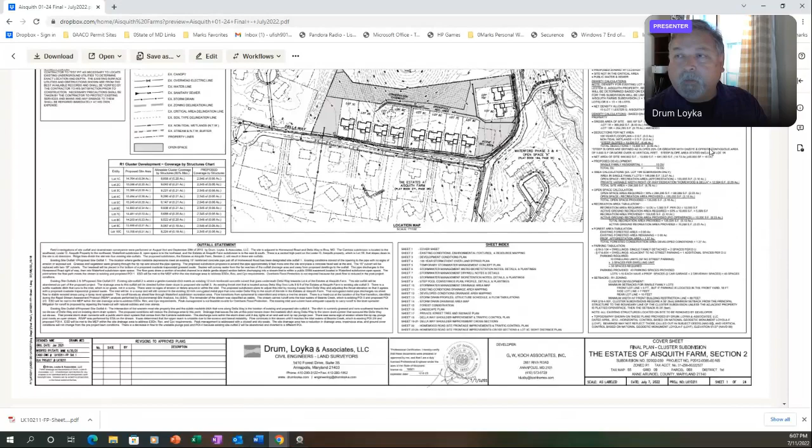So I'm going to slide back down to the step pool plan. First, in the existing condition, there's an existing squashed 15-inch pipe, looking at my north arrow, to the east of the big mansion house that's at the top of the hill, which is Lot 1R of the Estates of Aisquith Farm.

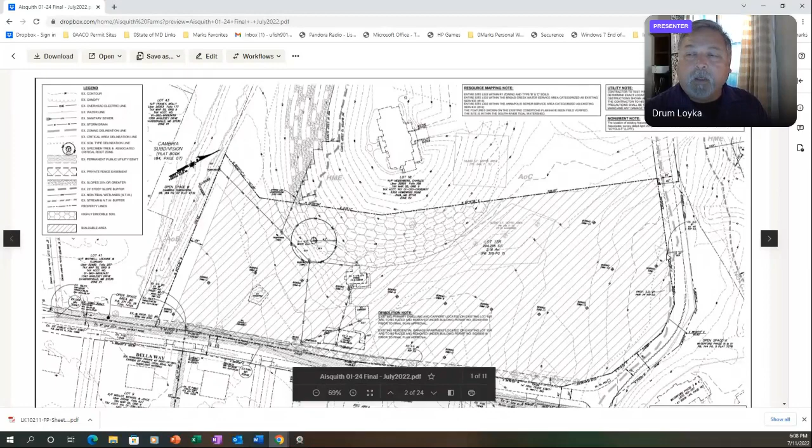And there's a sump area on the south side of Homewood Road that currently drains drainage area, but a majority of the water comes straight out to Homewood Road and runs along that north side and then enters the woods here. And you can see these curved contours is where that head cut has begun to form in the existing conditions.

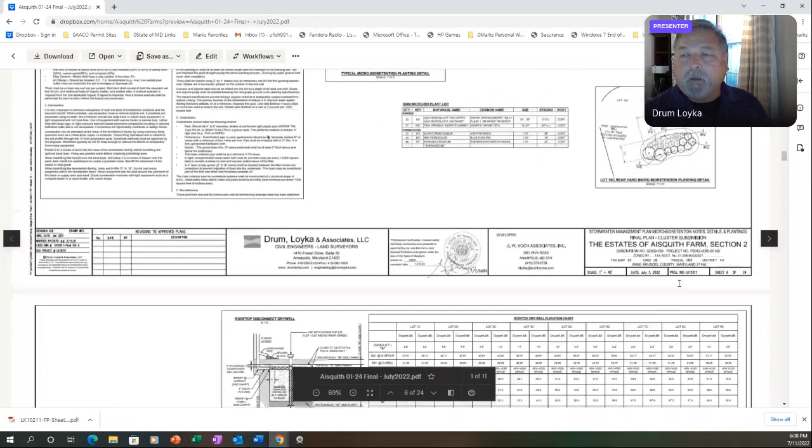And so I'm going to scroll back down to our plan, just so this is a zoom in of that area where the eroded swale comes through this site and where we've designed our system. Specifically, this meeting has discussed that existing head cut issue and the proposed developments of offsite improvements in conjunction with the subdivision of Lot 15R Estates of Aisquith Farm.

So the tax accounts involved are 102-6900-7457, 102-6900-74-965, and 125-690-222-527.

It's Tax District 1, Council District 7, the Honorable Jessica Haire, County Council person for that district, tax map 55, Grid 10, Parcel 323. The zoning in this area is R1 residential with 1 dwelling unit per 1 acre area. So the site itself where the subdivision is going is not in the critical area, but the step pool conveyance system is within the critical area.

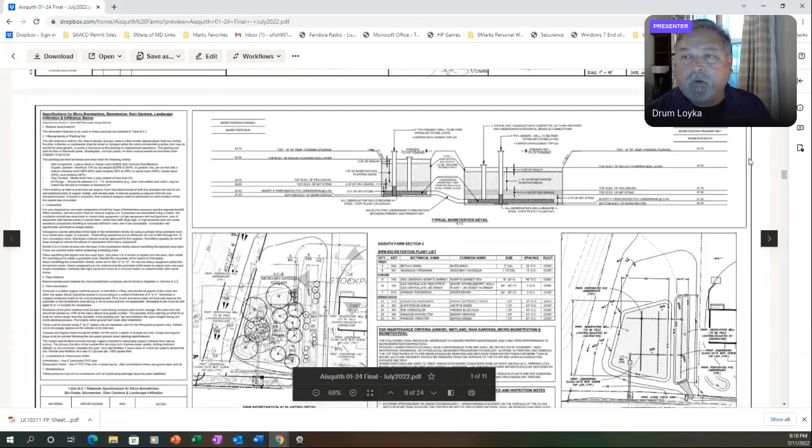So I'm going to slide up here just to show everyone that as I'm talking. The critical area line, here's our subdivision. This thin line here, it says RCA, critical area, is about midway through the open space of Waterford open space C, where the critical area line forms.

So the upper part of our step pool conveyance system is not in the critical area, but as you get closer to the stream and 100 feet of the stream, as we're trying to take this eroded water, stabilize it, and take it to the stream itself in a more stabilized fashion, we do enter the RCA critical area and the 100-foot buffer to the existing stream up from Beards Creek.

So the site is currently served by public water and sewer. We're extending public water and sewer where it ends right now at Delaware and Homewood, up Homewood Road to the end of our property to serve our 2 lots there and for potential future service of the lots, the big mansion house above us.

The schools in this area are Davidsonville Elementary, which is currently closed, Central Middle open, South River High open. The school impact project was on a 6-year waiting list, probably about 8 years ago now, and came off that waiting list, which allowed us to move forward. We're in the final plan phase of the project status.

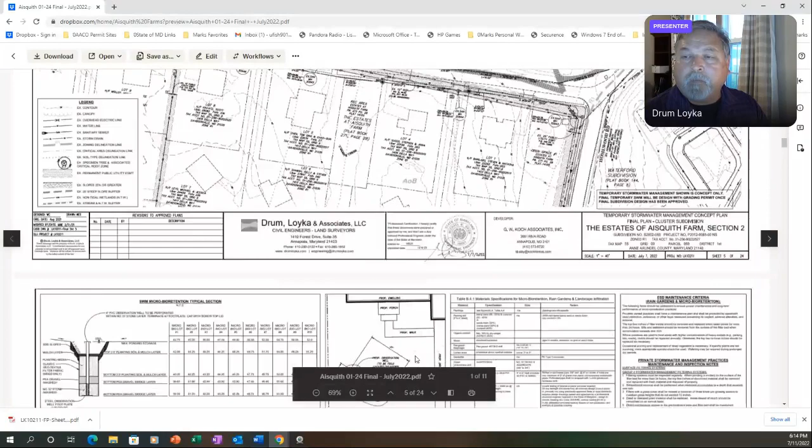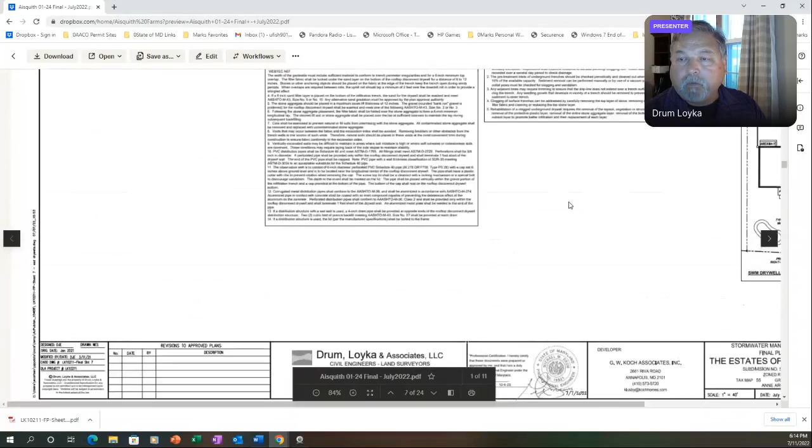So we have submitted an exhibit to the county as part of his evaluation, and I'm going to go back to that bigger plan page just to show you that exhibit. So I'm going to zoom in here. So the step pool conveyance system is a series of bays that hold water in a waterfall-like effect that collect the water from the head wall, settling it, taking the energy out of it, and working its way down in a cascade-like fashion till you get to the actual stream embankment.

The areas of the pocket wetlands: the stream is here, this double line here depicts the stream. One group of pocket wetlands was here to the south or southeast of the stream itself in this area here, and you see the 25-foot buffer in the dash line there. And then another pocket was found on the north side or northwest side, and the 25-foot buffer to that pocket was depicted on the plan.

Our LOD and our easements through the property are all between those two pocket wetlands in the area where the actual head cut is and the erosion is. So we are not disturbing non-tidal wetlands as part of our development. We are, however, disturbing the 100-foot stream buffer, which is this thick dash line here that runs from the stream up into the woods.

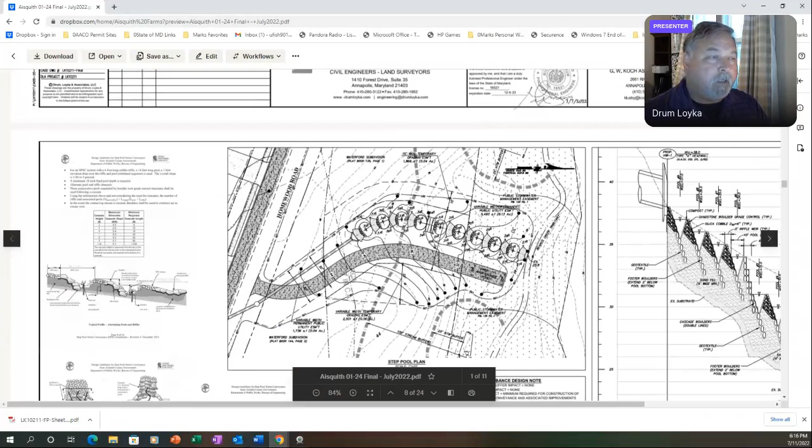This is the area of woods, and I don't know if those who are present know, but several years ago a tornado came down within that open space valley and knocked over a bunch of existing large trees in that area. If you were to look at this site 5 years ago, it looked all wooded. Now, on the aerial photo, you can see all the laydowns from those trees that were basically ripped open and knocked down as part of that tornado.

So in the existing condition, in the vicinity of the tributary stream of Beards Creek, which has that 100-foot buffer, there is disturbance within the stream buffer to construct this conveyance system that we worked with the Department of Public Works and Inspection and Permits to design to handle that existing head cut.

And I'm just gonna see if I can share some photos of that area with you while I'm talking, to help you get a feel for what that looks like. Oh, it's not going to let me do that, is it? I may share photos a little bit later. Right now, I don't want to. If I get out of this thing, I think I'm gonna lose my connection with you all.

But basically, the head cut starts about 30 or 40 feet in from the edge of Homewood Road, and then just gets deeper and deeper. It's like a foot deep up here near the top. And then by the time you get to the bend here where the stream erosion bends around, it's 3, 4, 5 feet deep that cuts through here, it is just eroded through this area.

So the step pool design, and I'm going to show you a profile of that, allows us to pick up that head cut and create energy dissipating pools that'll help slow the water down and dissipate it and slowly cascade down till we get to the flatter area at the bottom where the stream is. There's a large flat area to the south of the stream, and then about 50 or 60 feet in, it starts the steeper area of slopes, and that's where you see that eroded area.

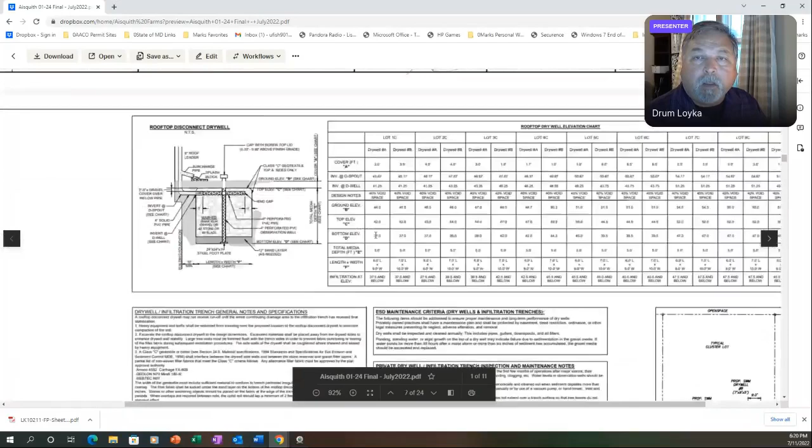Let's go back up to the top here for a second. This entire area to the north of our site is a big empty meadow with a single 42-inch hardwood specimen tree in the middle of that field. We are reforesting or afforestation all in this upper area here between us and the mansion house above us. So this whole area will be replanted. And then in addition to that, as part of the step pool conveyance system, there's a lot of planting that will go on along the edge of the pools themselves on both the east and west sides.

And then the county has asked us as part of this design to have a mulch access path so they'll be able to get down and maintain this pool as part of its overall development over the years. So we have this mulch access path, not asphalt, not concrete. It's a mulch access path, and there'll be more planting in the area where we're disturbing to grade out the path and the step pools to help stabilize this area.

The wetlands delineation and its buffers and the proposed limit of disturbance have all been adjusted to make sure we stay out. As our wetland consultant asked us to try and stay out of the stream itself, we pulled things back here to do just that, but we still have to outfall to the stream to convey the water. If we stop 30 feet short, it's just going to erode out down to the stream the rest of the way. So we're taking our conveyance to the top of the embankment of the stream.

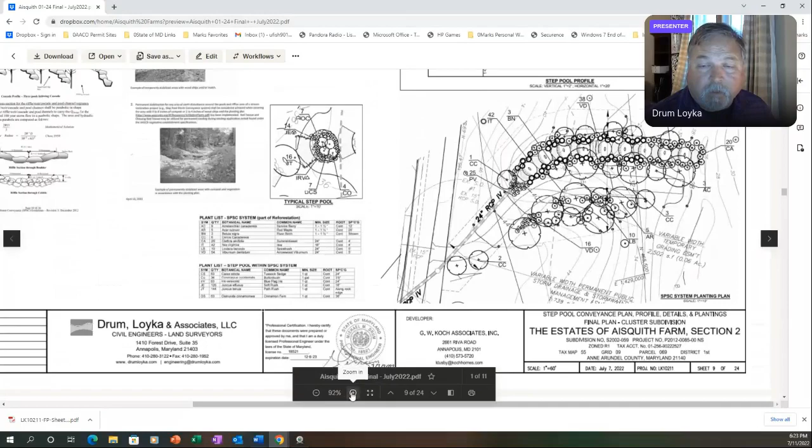So in this area, I'm going to see if I can zoom in here. If you're with DPW, hopefully you've gotten a copy of this. This planting hasn't changed since our last submittal, but as I zoom in, it seems to be getting a little blurrier. I apologize for that, but I believe Deb knows her native versus non-native species well. Lisette, if I stop sharing, would it be easier for you to try and share, if you think you can zoom in on that list better? Right now, I'm using a PDF. Go ahead. I think my wife has a hard copy of this that she got in the mail.

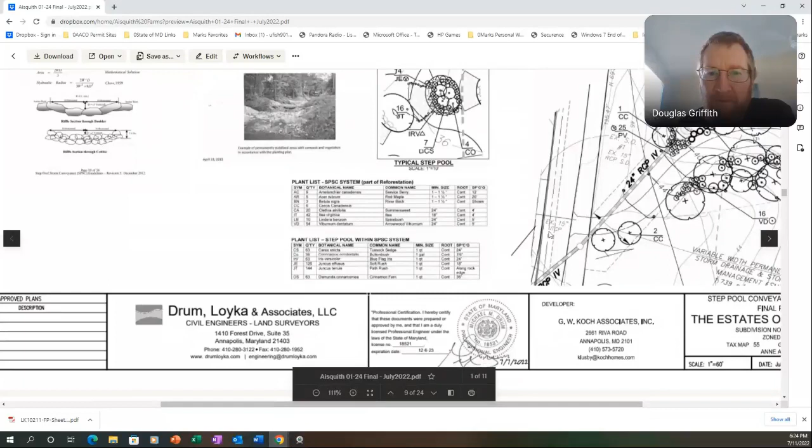So maybe I'll look at that, and if I have any questions. Yeah, and worst case scenario, that's one of the reasons we get the email addresses of everyone. We mail out meeting minutes and address questions, but we can also email PDFs of the plans to anyone, Doug and Linda, Cynthia, or any of them.

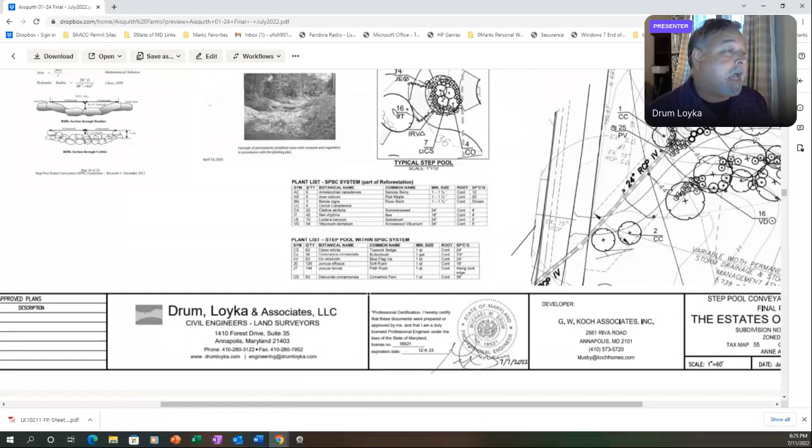I will warn you that one specific sheet is not a bad email as far as size. If I try and email you all 24 sheets, it's like a 150 meg drawing. We can try and zip it down, but I can specifically send sheets pretty easily. They're much smaller. It's just the conglomerate of 24 sheets that makes that email slightly bigger.

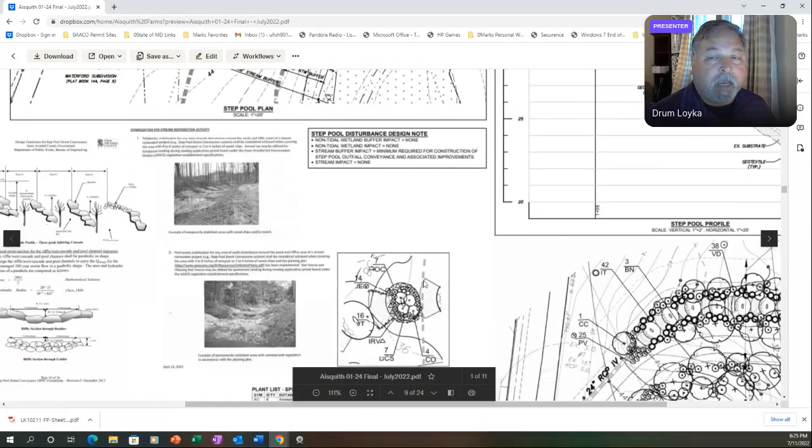But we can do an 8.5 by 11 zoom in of the species list to make it easier to read. I can see it, but as I zoom in, at least for me, I'm assuming it's the same on your screen. Yeah, it's pretty small. Yeah, tough to see. I'm sorry, Doug and Linda, did you guys have a question?

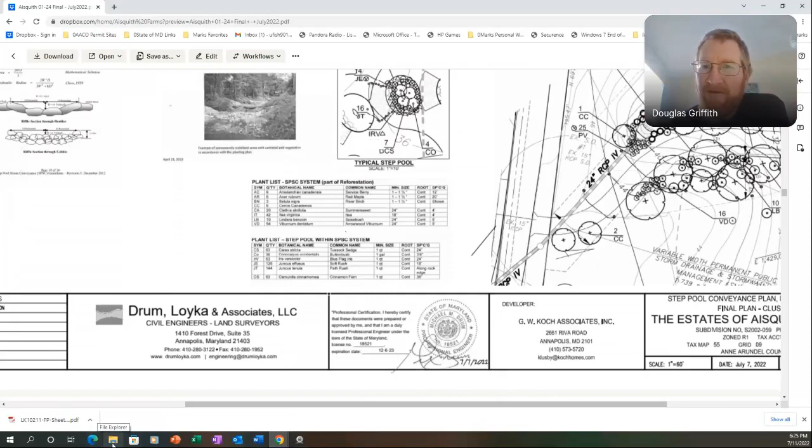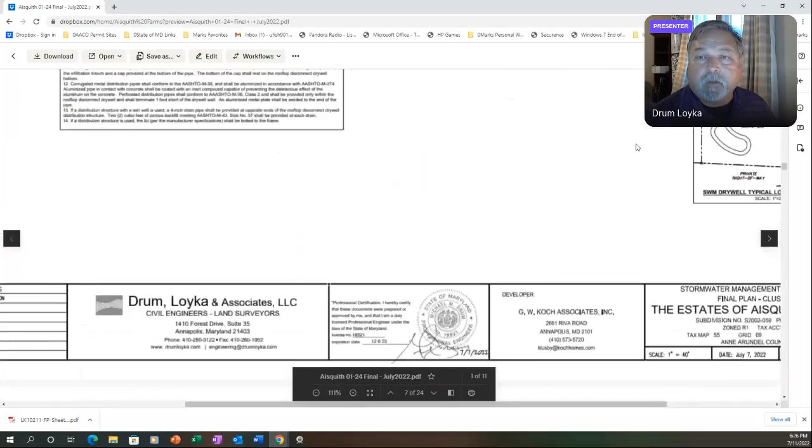I do have a question. It talks about the step pool having frontage on both Della and Homewood. I'm sorry if that's poorly worded. It only has frontage on Homewood. So where the step pools are being created only has frontage on Homewood. I'm gonna go up to the very cover sheet, which has the design. So the intersection of Della and Homewood is down here. Right. The step pools are up around the bend.

If you know the area, the existing bituminous curb ends about here, and then it's just open section road as you head up Homewood towards the driveway that gets you access to the lot 1R mansion house. Correct. So the old 15-inch pipe is right here. Okay. And the erosion is, if you go in through the woods, there's a little opening there from time to time, when the brush hasn't grown up.

Exactly. If you go in there and walk into the woods about 30 feet, it's flat up here at the top, but as you work your way northwest, all of a sudden you'll see that head cut. And I have pictures when it was pouring down raining, and you can see the path of the water coming through the woods. But I fear that if I try and bring them up right now, it's gonna log me out. But I can also include them.

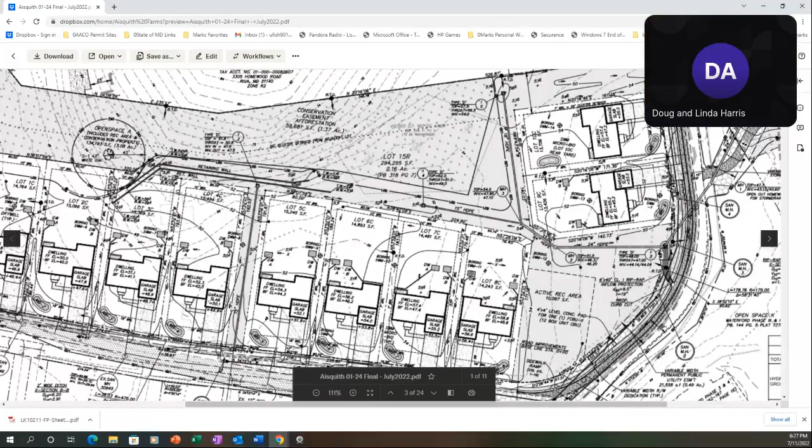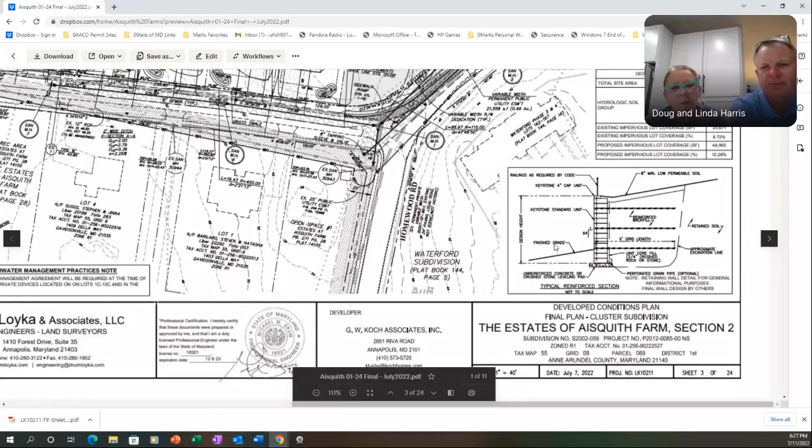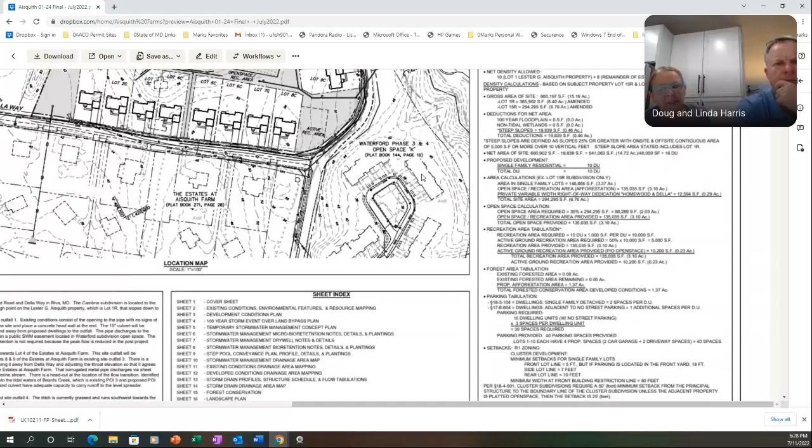Yeah. So right now, we already get a ton of water coming down our hill. So we're wondering, is this going to help us as well, or is this going to make it worse? To answer that question, I believe absolutely, because right now water comes off this whole upper hill here and drains down Della out of this driveway. This little 15-inch pipe that's currently there now is squashed. If you've ever walked up along this road, it's hard to even find it because the grass is so high.

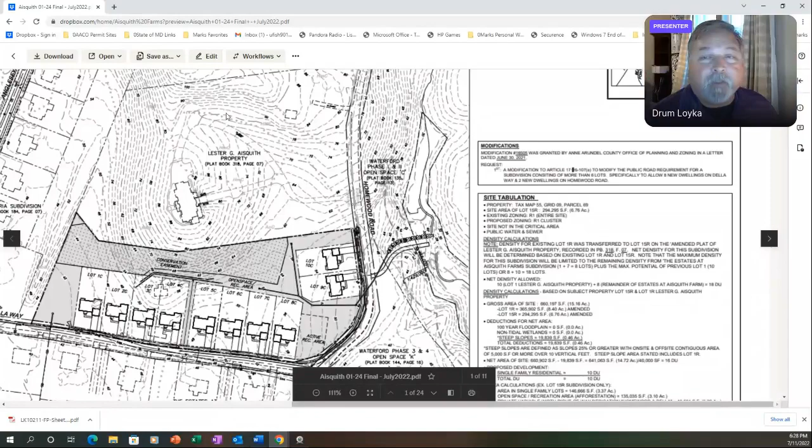Yeah, I know what you're talking about. It's our observation when we were out there doing our topo and location that very little water actually gets into this little 15-inch pipe. Yeah, we'll attest to that. Everything comes down from this mansion house. Let's see, I think I have a pretty decent drainage area map here.

Go up to the top and actually read my own legend. I can probably find this a little faster. It's a little tough to see, right? Yeah, it's a little tough to see. I was trying to find my overall drainage area map. Sheet 10. Okay.

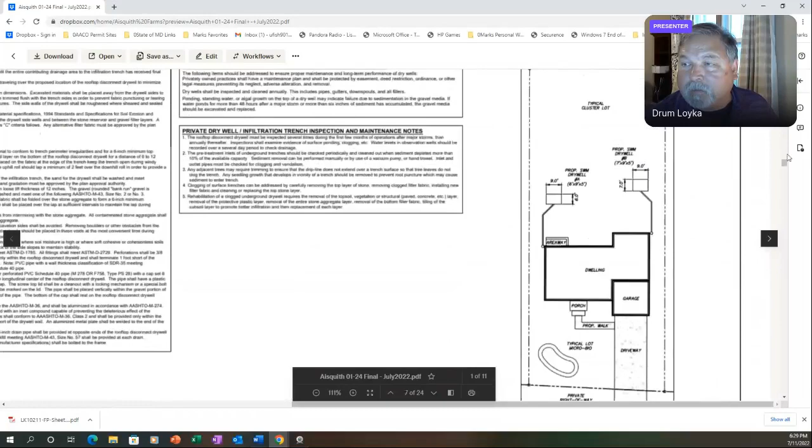So that's sheet 6. I'm going to slide down here a little faster. There we go. Aha, that's better there. That's sheet 11, sheet 12, 10. There you go. So right now, all this water comes way up from the top, even beyond the mansion house and to lots above it, and drains down Homewood Road here.

And then this area here, in theory, was going to that 15-inch. A lot of this was going to that 15-inch culvert. It couldn't handle it, so it was topping over the road anyway. And then continuing down to where the bituminous curb is, and it's not curb and gutter, it's bituminous curb, and it's hopping over. And I have a picture, I guess the opening here, that I guess Waterford has come up with some little diversion, little berm type things along where there's like a path down towards these end units here, to try and push it around this end unit and down.

And so right now, all this water is coming down the road, and basically crossing where there's no bituminous curb. It's going straight into the woods. Where there is bituminous curb, it's ponding down here at the lower end. Then finally, when it gets high enough, it tops that bituminous curb and then comes down towards these units and around.

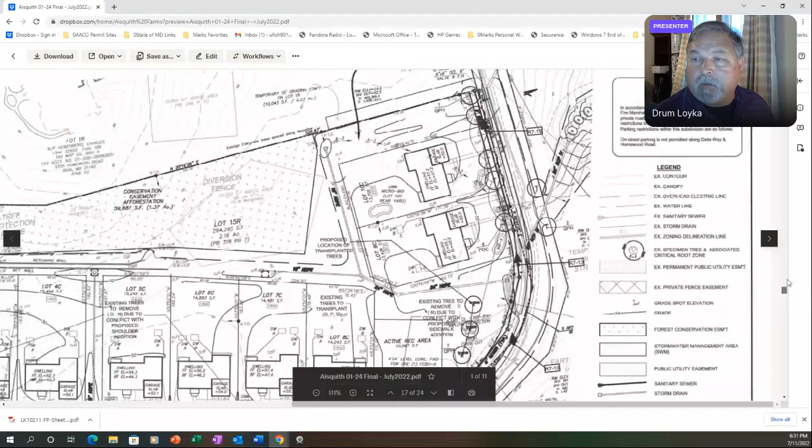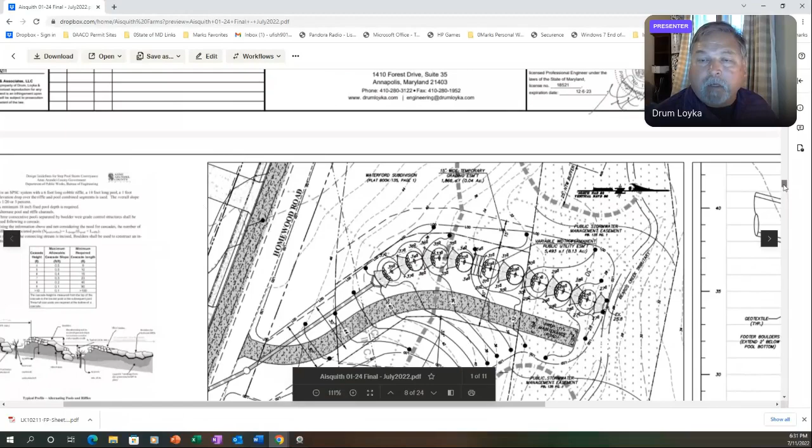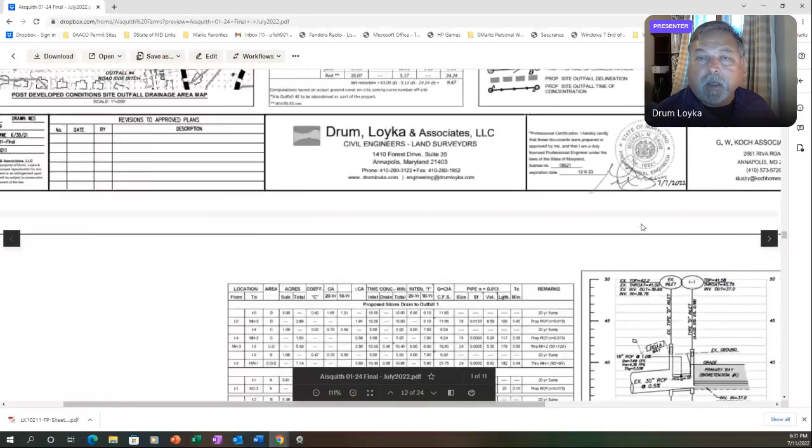There we go. There's a certain amount of water that's still going to sheet flow off of Homewood Road across there and actually get into these top couple of pools. But a lot of the rest of the water that is affecting Waterford right now is going to be picked up by our storm drain systems and brought to this head wall. So we're basically diverting much of that water. Let's go back down to that drainage area map. And we're bringing it to an actual designed system. What did I say it was?

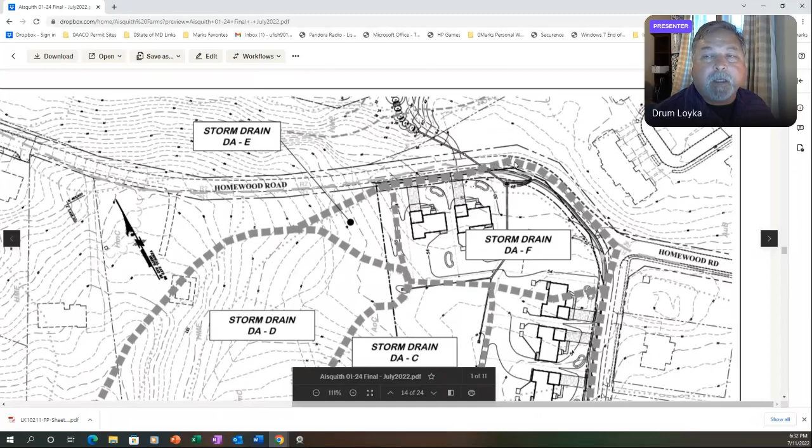Sheet. There it is. So right now we're capturing it all in inlets here and here and here, and we have curb and gutter on our side that has a throat opening. It's going to come in that throat opening here. So a lot of the water coming down here that then super elevates and goes across is going to be picked up along this line here and taken through these step pools and managed that way, which is going to take a lot of pressure off the water that right now has nothing stopping it and gets to that bituminous curb and hops over. Does that make sense? Yes. It does make sense.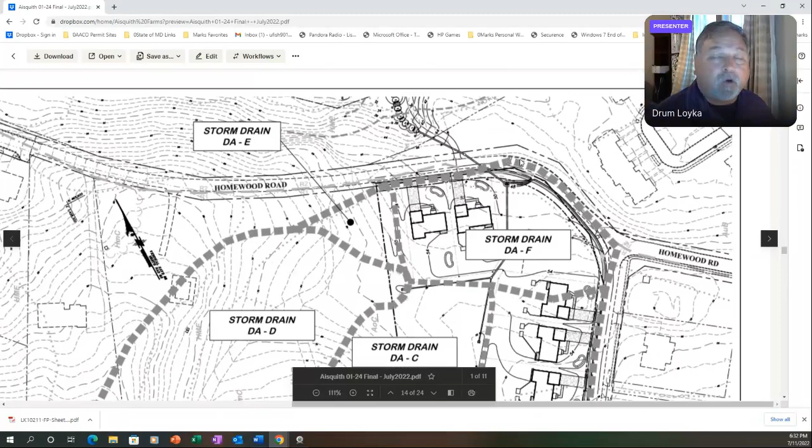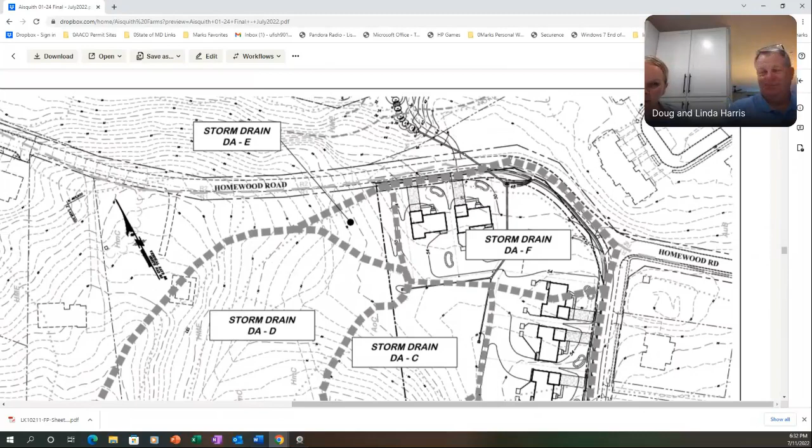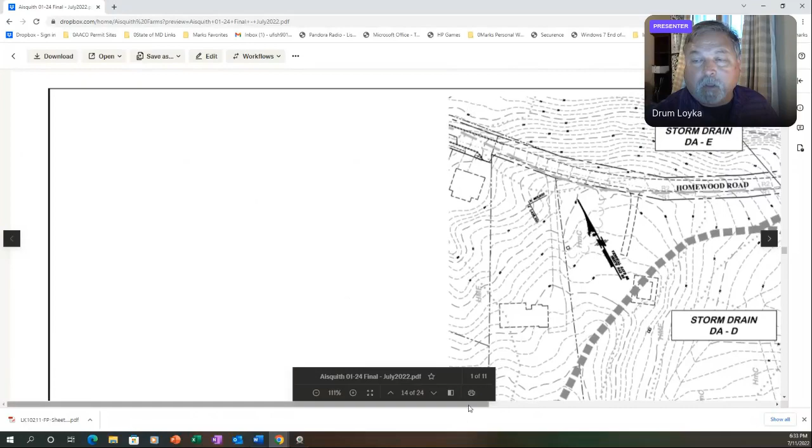Will there be a curb on the Waterford side as a result of this? There's an existing bituminous curb there now, and we're basically taking the pressure off of that bituminous curb by what we're picking up. Doug, does that? It's a very small curb that really doesn't deter anything at all, to be honest. And that's why by us adding all these inlets and the step pool design, we're going to basically take from these drainage areas. I thought they were on this plan, but it's a lot of acreage that we are picking up that right now isn't getting picked up and going straight to that bituminous curb. We're picking it up and conveying it through the step pool to the stream.

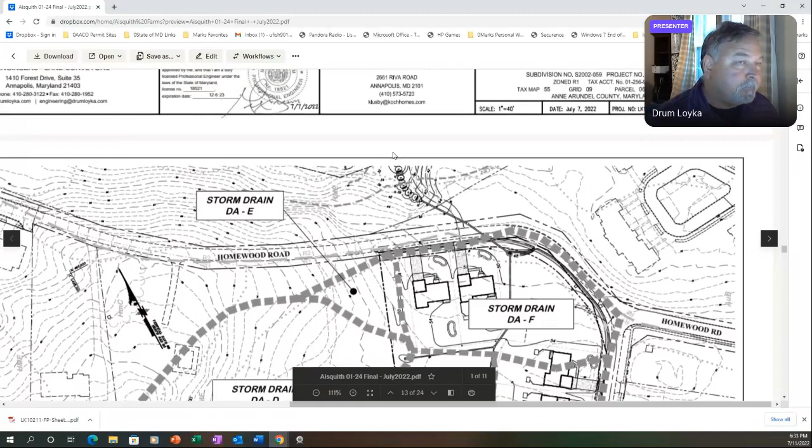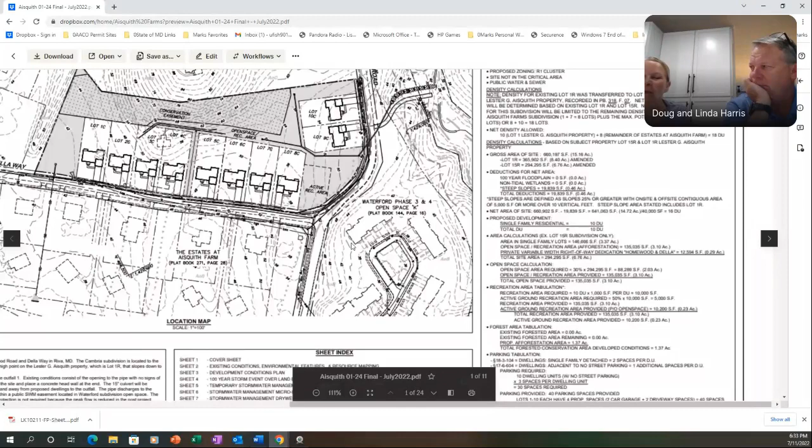Okay. Now, another question that I had is, it's really affecting the townhomes, especially our little row of 6 homes, but then the ones that are right adjacent to us, I think it's 3201 on down, because they literally back up to this, and the water comes down a hill and hits the back of those townhomes. And I don't know about the ones up the hill on Escapade Circle, what they have, but they have a greater amount of woods than we have. Are you going to be widening the road from our side or from, I call it, the mansion side? From the mansion side.

On the mansion side, we are widening. So right now the road is super elevated and sheet flows over to that bituminous curb. Super elevated meaning it's all angled one way. Normal roads are crowned. And so we're redoing all the pavement from Della Way up to the end of our lot to crown the road. And so we're going to have curb and gutter along our south side of Homewood and a curb opening to a stormwater management area.

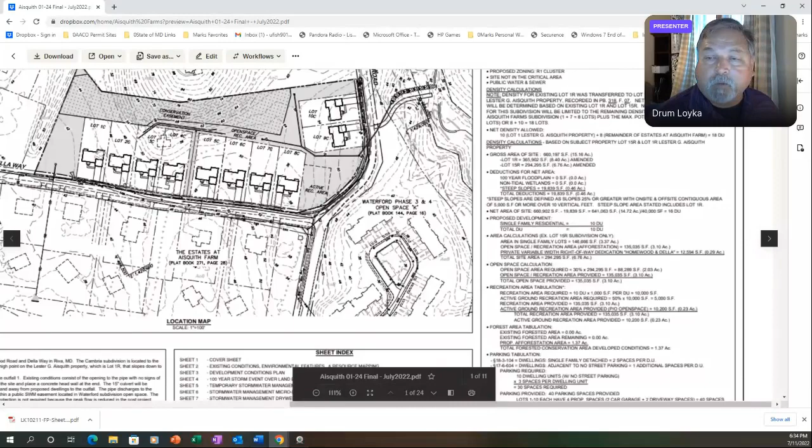So this curb cut is here. So we're repaving this whole area to actually crown the road so that the south side of Homewood Road, instead of being super elevated to the north side, we're crowning it and bringing all that water in and picking it up so that only the Waterford side of Homewood Road in the area of our development, the crown part of it will still go to that side, but that's a normal design as a crown road.

Right now it's super elevated, so we're crowning it on our side to bring the water from the south side of the center line of Homewood back to our site through our curb cuts to our inlet structure, and then piping it through to the step pool. Hopefully that answers that question. I think so. I think so.

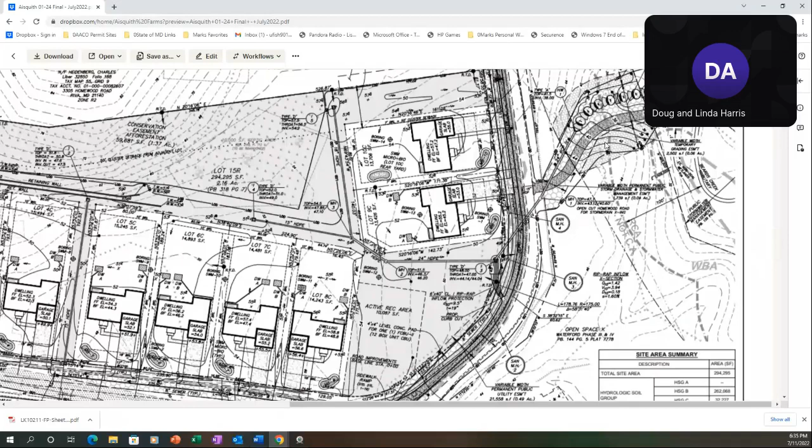You mentioned earlier as well, what does shared cost of maintenance mean? So right now, Koch has been working. Homewood Road itself is a private road that services the Estates of Aisquith Farm. It's a private road. In other words, it's not a county road. Correct. So there is maintenance responsibility from the different developments that abut Homewood Road, and there's maintenance agreements that Waterford has for themselves.

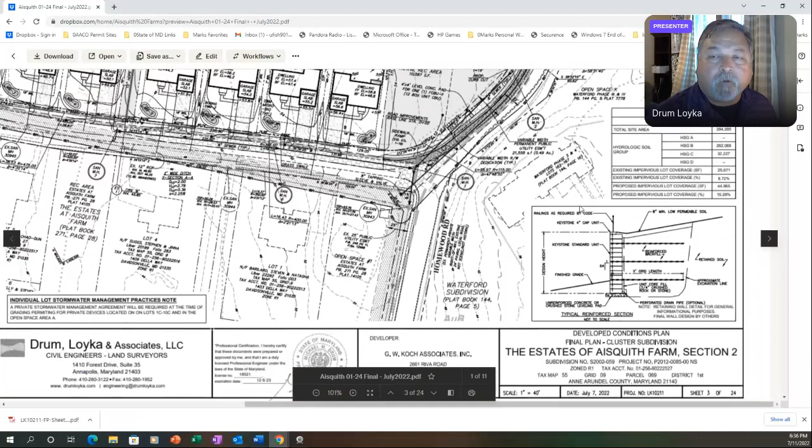Della Estates of Aisquith Farm had for themselves for Della and their portion of Homewood down here next to their open space in lot 1. And then we have our new lots and our HOA maintenance. So all these different communities abut Homewood Road. And so Koch has been working to consolidate them into one maintenance thing for Homewood Road instead of Waterford just maintaining their side, and the Aisquith Farms maintaining their side, and then Koch maintaining the south side of this.

They're trying to get together and organize with the HOAs to have a maintenance agreement where part of everybody's HOA dues are covering the improvements, so that when there needs to be additional improvements on Homewood Road, it's a shared maintenance agreement. So the attorneys for Waterford and Koch and the Estates of Aisquith Farm Section 1 have been working to come up with maintenance agreements.

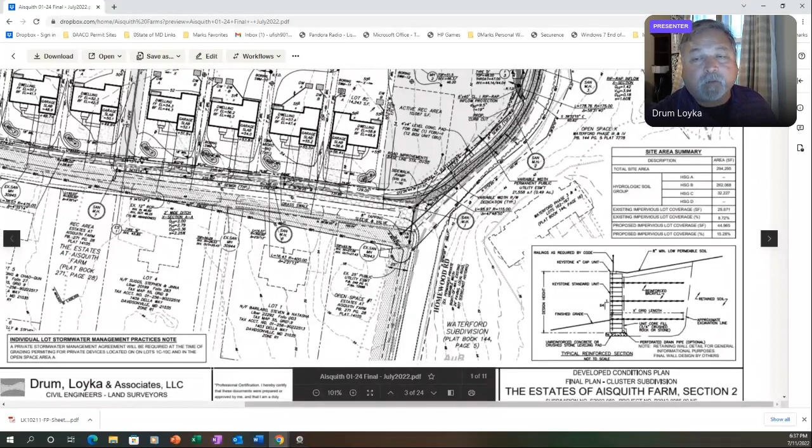We have a shared use of Della with the Estates Section 1, and then we have a shared road where the Estates has this portion of Homewood that they have responsibilities for. Waterford has responsibilities for Homewood, where it goes all the way down to, I guess that would be east, where it intersects with the first public road, and through here. And so Koch is trying to organize so that it's one document working through the maintenance, not just 3 different homeowners with their own maintenance agreements.

Well, yes, because let's face it, if road work needs to be done, it could be pretty expensive, and we could be saddled with big additional costs to our dues. So that frightens me, because road work is not inexpensive, as you all know. And I just want to make sure, because one of the letters that I read, and I don't know if it was from my own homeowners association, but the townhomes really enjoy using that road.

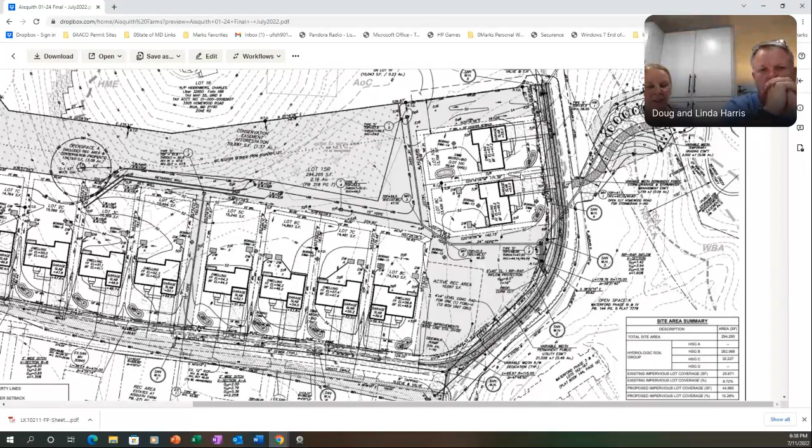Well, are we going to put a gate up so that the other homes in Waterford can't use it? Or what do we do here? I think everyone needs to share it, not just Waterford townhomes, but everyone in Waterford needs to share the expense. Right. And so Koch obviously is adding 10 lots to Homewood, people paying dues. So that's 10 more homeowners that are going to be contributing to the overall maintenance fund.

But I know the reason that we last met in February is for the last year, there's been a lot of negotiations. The layout and lots haven't changed much. We've gotten comments from I&P and DPW and tried to address them as far as the overall subdivision and the step pool design. And we got to a point where we don't have any more comments from I&P's Brad Bodman or, I'm sorry, Mr. Griffin, as far as DPW is concerned, on the step pool design.

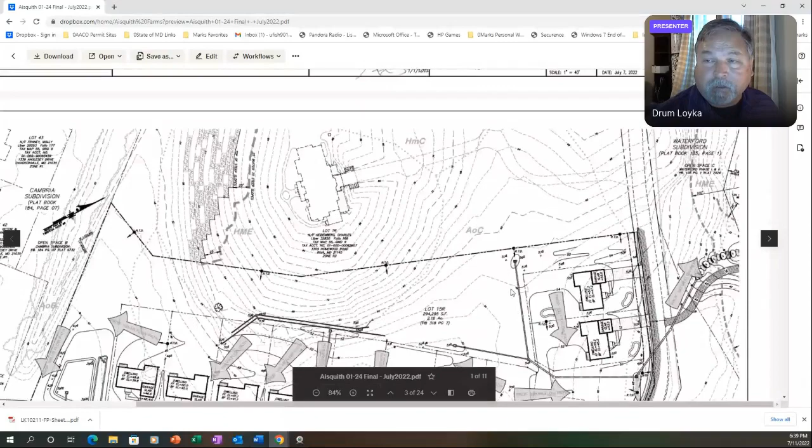Just to kind of clarify this even more, Waterford has an open space C that is this first thin line here up to Homewood Road. And then they have a separate open space for a different section of Waterford that is C. It's like B and C or K and C.

And then this thin line here, Anne Arundel County has an existing public stormwater management easement that controls the last 50 feet to the stream, and then on the other side of it, that's on the Waterford plat. And so we have Anne Arundel County, which, maybe not for this meeting, but Doug is part of the DPW that I guess has a lot of the easement responsibilities for all this stormwater management, ultimately that leads down to the big pond south or northeast of this stream and past all your townhouses.

There's a big pond. Right. I'm sorry. And so there's a big county public easement for that. So we worked with I&P and DPW to design these step pools, but when we leave Homewood Road, this is not Koch land. This is not Aisquith Estates land. This is Waterford HOA open space, Waterford HOA open space 2, and Anne Arundel County public stormwater management easement.

So we had to work through all that to try and work out what we're doing and getting this design approved. So that's what Koch's been working on with both Estates of Aisquith Farms HOA for all our road maintenance on Della and Homewood, and then Waterford HOAs on this potential easement that we have to get from Waterford to fix this eroded stream and have our outfall. And it's taken a year.

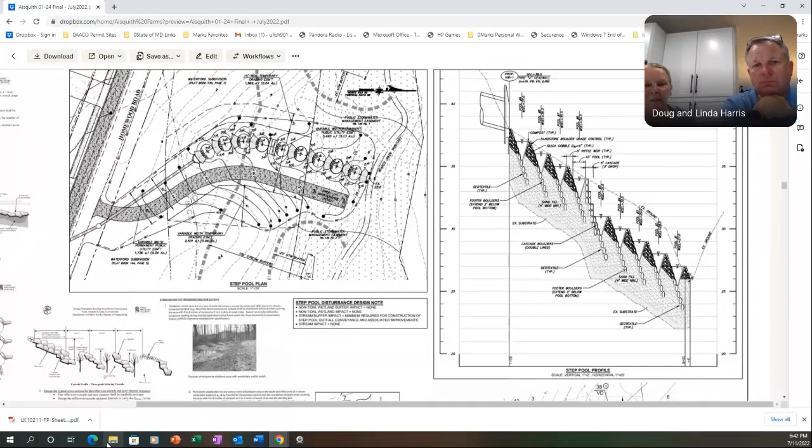Because we're in a townhome, clearly it's because we choose to be here and we love it because it's quiet and peaceful, and you don't feel like you're in a townhome community. Many of us have come from large homes, and it was time to scale back. So I'm excited to look outside and see beautiful homes. I'm excited to see wonderful children running around and all those good things. But at the same token, I want to be sure that I don't have to lose the pride of my home. And I want our homes and our neighborhood to still be beautiful too. And I don't want it to be affected by horrible things, big expenses. And it sounds to me that you guys are really doing what you can do to make it a better place.

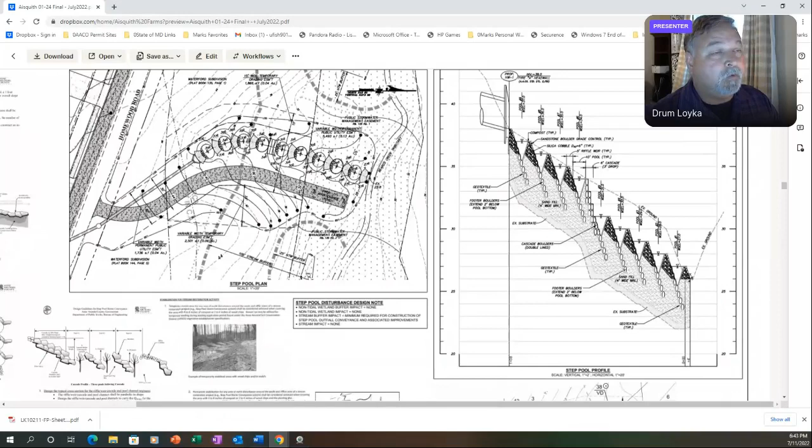And let me just, I'm not sure if I said this, but this easement that we're doing in this step pool design, we're creating a public easement for this step pool design. And Douglas may interrupt me if I'm wrong, but once it's built and the county has reviewed it, inspected it, and said it's built to their specifications, then the county will have the maintenance responsibility for the step pools. So that doesn't change Homewood Road and any maintenance responsibilities for Homewood or Della. But as far as the step pool conveyance, your HOA dollars aren't going to be going to maintain it because it will be within a public easement.

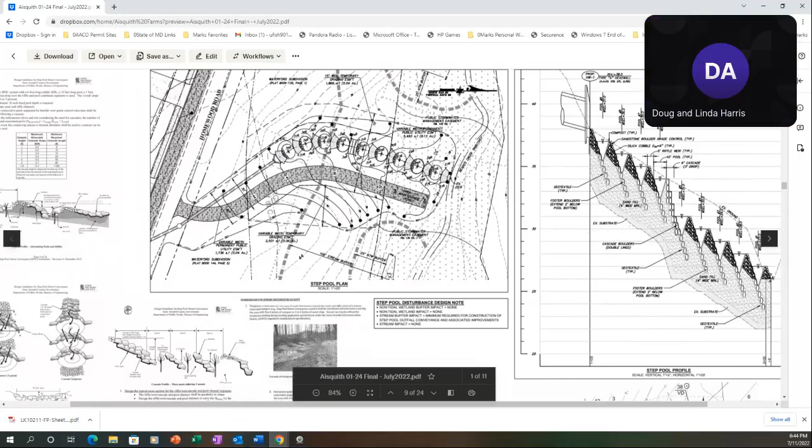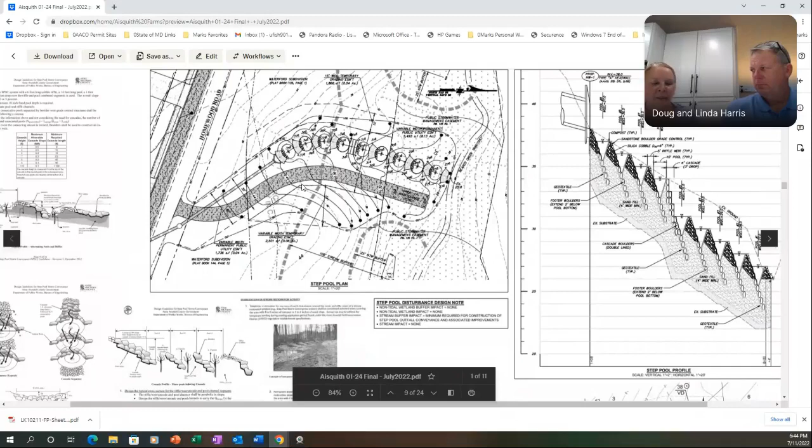Okay. It will take as-built and certification and approval by DPW that it was built to their standards. But once that's been accepted into the public system, then the maintenance responsibility of the step pools themselves will be DPW. So is this the same pool? Is it connected to the, I don't know if it's a step down pool or just a reservoir that they put at the bottom of Homewood? I think when it crosses Anglesey, there's one right over there as well, and that's all fenced in, for safety reasons, I guess. You mean further north, for the Stone Ridge community? No. It's the Cambria community. It's not even to the bottom of Homewood. It's at Homewood and Anglesey.

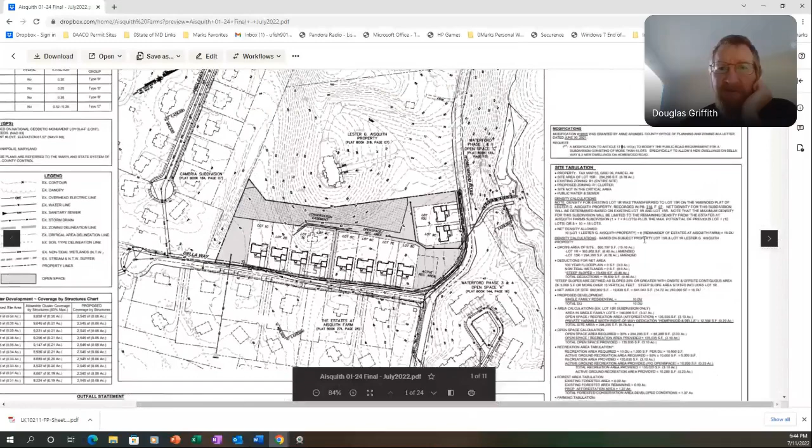Right. I believe that's just a stormwater pond. I was going to say that's a storm. So Cambria, if you go up Homewood Road, most of Cambria is on the south side. There's a few lots that border the right side. Then where Anglesey comes into Homewood is Stone Ridge, and that runs all the way up to Riva through Connecting Road there, if I remember correctly. It does go to Riva, correct. Right. I worked on that subdivision 20-some years ago.

And so that's a stormwater management pond at the bottom of Anglesey and Homewood. That treats all their stormwater management. I can't remember how many lots it is up there off the top of my head, but I think there's like 30 lots up there. That subdivision was done pre-ESD to the MEP and micro practices, so back then they were still doing large ponds.

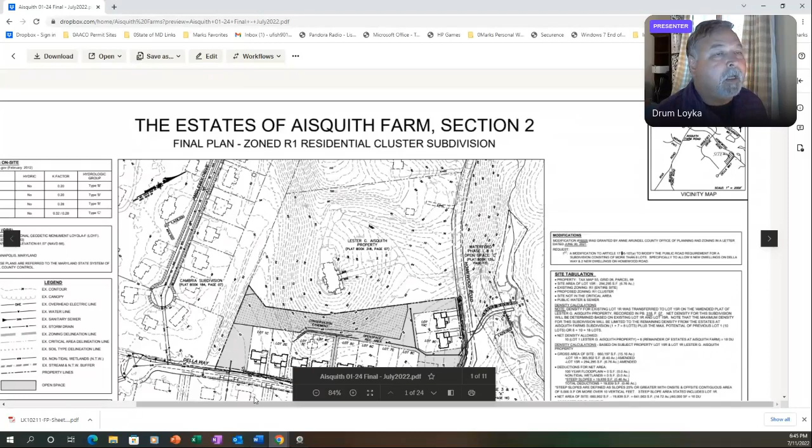Our new subdivision design falls under the new criteria where it's a lot of micro practices. Each lot is going to have their own rain gardens and dry wells to manage most of the on-site water. And then we have a small facility here in the open space, and then we have our step pool conveyance, which can be a combination of stormwater conveyance, which is storm drainage, but also a bit of treatment, stormwater management volume wise.

And so in today's world, you don't have big ponds anymore, like the one if you follow the stream further east to the big pond there. In today's subdivision design, we don't have big ponds anymore, at least not on the ones I've worked on. It's all micro practices. I've got some with 8 to 10 micro bioretentions throughout the open spaces, and then each lot has their own devices. I don't anticipate any more big stormwater management ponds unless the regulations change in the near future. Okay, that sounds great.

So can you point out with your cursor exactly where the open space is going to be? I think it's at the corner of Della. So right now, this is Homewood Road's northern boundary, and then this line here is ours, and we're dedicating right-of-way here to do our road improvements on our side to widen this. So this angled line here is open space K for Waterford phases 3 and 4.

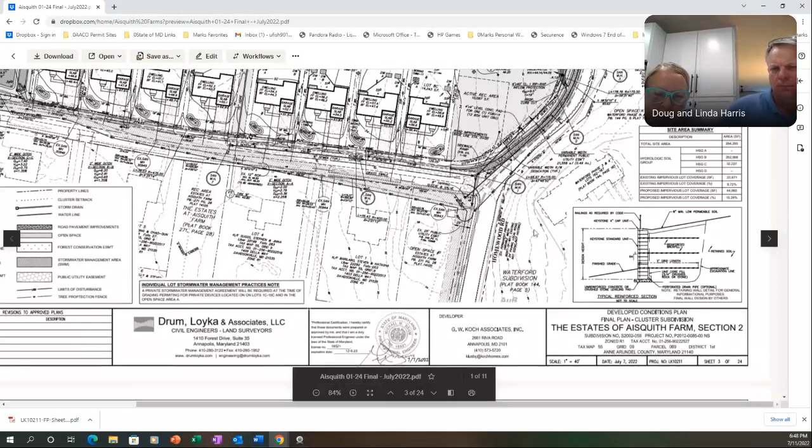I was talking about across Della Way and Homewood where you guys are building. Where is your open space going to be for recreation? Our open space is right on the corner. This gray area here that's shaded, and up top. So where that one tree is, if you've ever been on Della and Homewood, there's only one tree. We look at it every day. So we're preserving that one tree, and from the backs of these lots all the way up to our property line with lot 1R is all open space. Right now it's meadow. It's all going to be reforested.

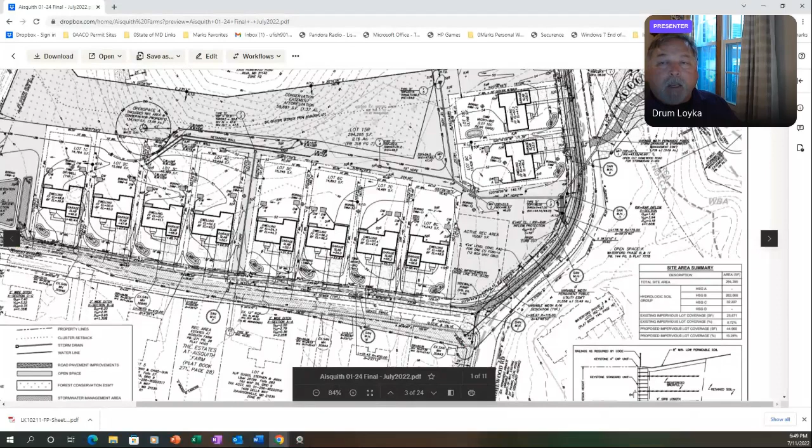And then we have a big triangular open space area between lot 9 and 8. And then at the top between our lot 10 and that mansion house lot, we have more open space up here. So all the things you see in gray, and then we have a large micro bioretention, but it's not a stormwater pond, on the left of our lot 1C. So this gray is open space. All this is open space, this is open space, and this is open space.

Okay, thank you for taking the time to explain that. That makes a lot of sense to me. No problem. I appreciate it. Do you have any more questions, Doug and Linda, before I check with Amy? I'm good. I think I'm good.

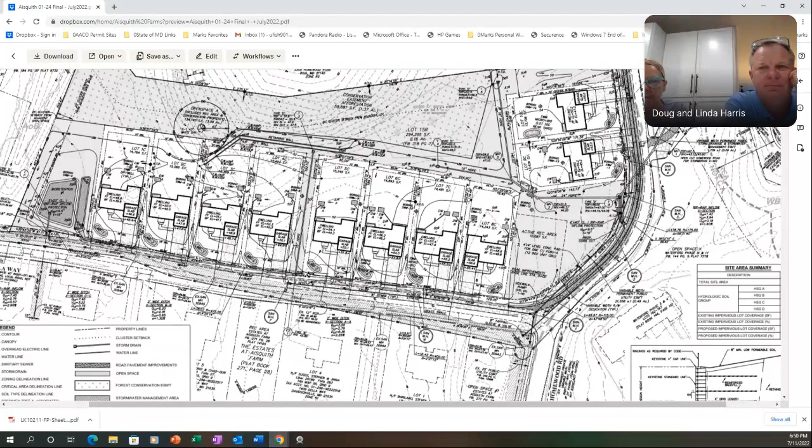Amy, Cynthia, or Douglas, any more questions? Hey, this is Amy. I actually do have a couple questions. So the stream, as I understand it, from the step pools, the water will be funneled into that stream, and it'll then continue down to the large pond that's at the corner of Homewood and Breckenridge. Is that right? Or that's on Breckenridge Way? Breckenridge. That was the name I was looking for.

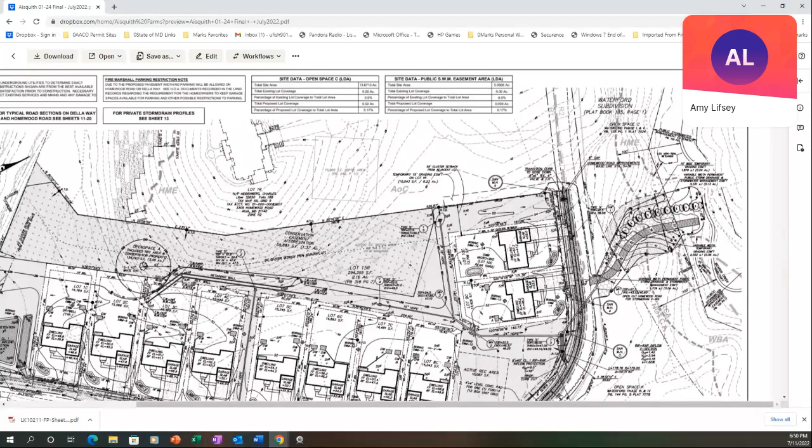Breckenridge. Yes. Okay. Do you have any idea how much additional water we would be expecting to go through that stormwater pond, and whether there would be any kind of changes or impacts to what we're seeing there? So it is the same amount of water right now. That drainage area I showed here. Let me scroll down a little bit again and see if I can find that drainage area map. The water is coming there now. It's just sheet flowing over land and creating that erosion.

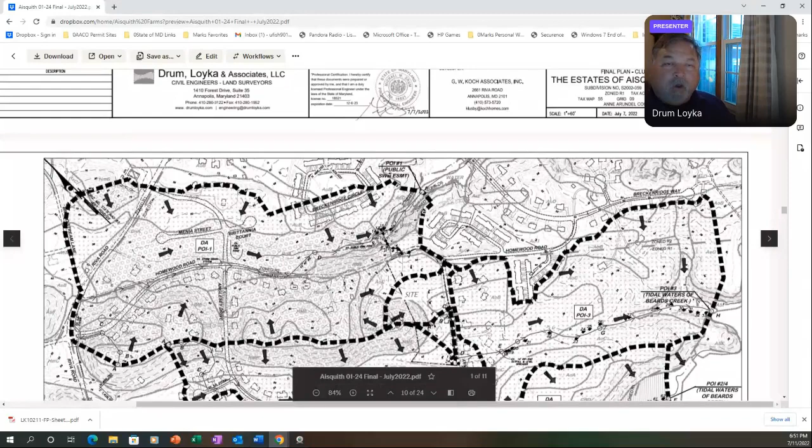So there's Breckenridge. Let me just see if I can get myself oriented here. I apologize. There's Homewood Road. So the pond is right here where it says water, right there. And so this is the overall drainage area to that pond now. We're not changing it. We're just picking it up. So it no longer is sheet flowing from our site and across the edge of pavement and creating that erosion. We're picking it up and piping it and building these step pools. So we're not increasing the amount of water to the pond.

We're just treating. Treating is probably not the best word for it because we're capturing it, but right now it's causing erosion both on the backs of these townhouses on Waterford and in this area of open space woods. We're picking it up and now stabilizing how it gets to the stream, but we're not increasing the drainage areas to it. I'll double check my numbers here and then I'll include that in the meeting minutes. But we're basically just taking an area that right now is sheet flowing and causing erosion and picking it up and building a step pool conveyance system to help prevent that erosion and repair it. Great, thank you. That makes a lot of sense.

And then I believe it was Linda who had asked questions a minute ago about Homewood Road. And I know that at the meeting last February or March, I'm not sure whether it was you who was speaking or somebody else. I think it was Kevin Lusby. Well, I've been in every meeting. Kevin Lusby from Koch. Okay. Did a lot of the talking in the last couple of meetings. It may have been Kevin Lusby.

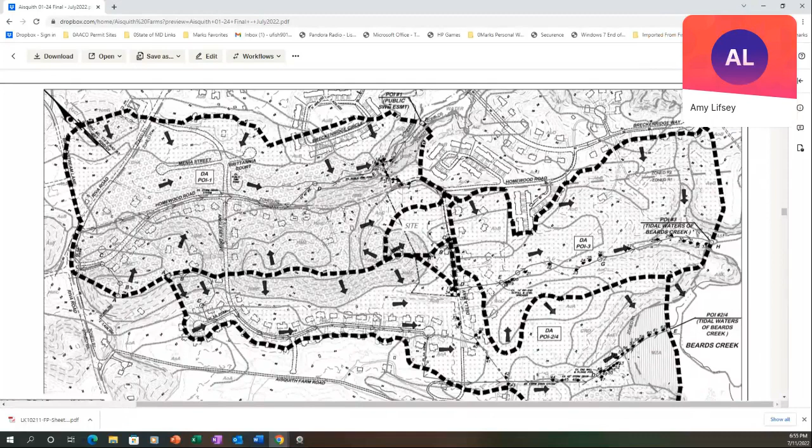Okay. Cynthia? Anything from Cynthia?

How about Charles? Well, Charles, you just joined. I'm not sure how much you know. How about Doug? Let's go back to Douglas Griffith. Doug, do you have any additional questions now that I've gone through answering Doug and Linda's questions?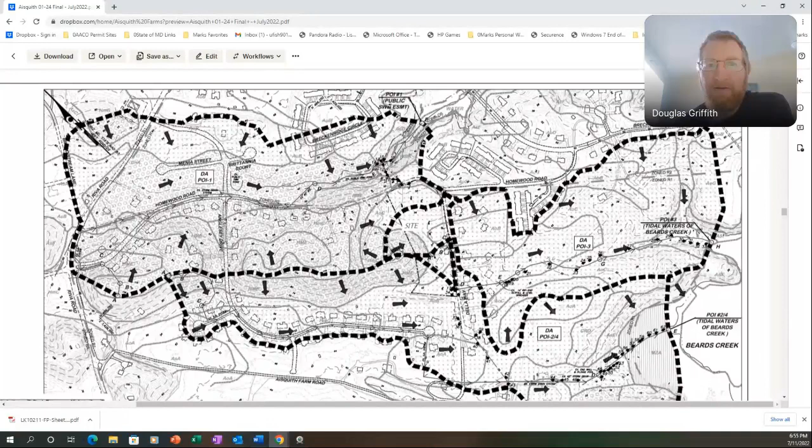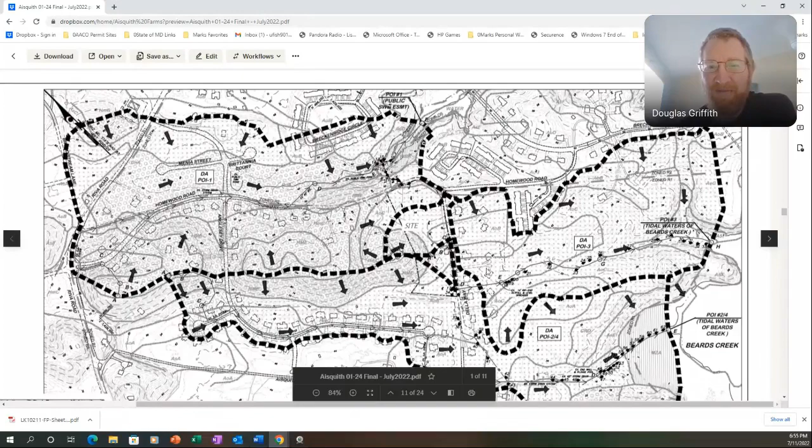Yeah, I have one more question. I don't want to take up too much time though. And you can call me. Anybody can call me at the office if you want, if you think of something else. It's a quick question about the reforestation, the forest loss mitigation. Okay. I think it's great that you're reforesting that meadow. I don't think it's a very high quality meadow over on the Koch Homes side of things. This is that reforestation plan.

Yeah, pretty full. Was there ever any discussion about giving the Waterford community some trees as part of the mitigation to replace some of our trees that we've lost in our community? To the tornado? Yeah, or just to age, disease, anything? Not to my knowledge. I mean, we're doing the planning, but I don't know if Mr. Lusby and the HOA presidents have had discussions to that effect, but they haven't brought it to my attention. Okay.

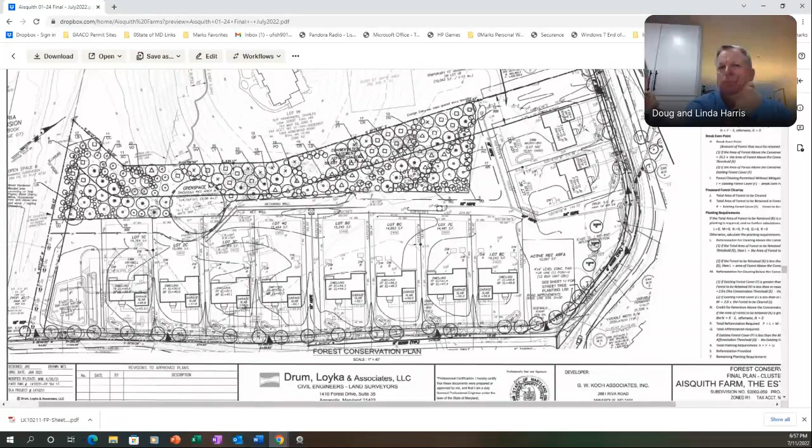Lisette, the lady that was in 787-9562. Yes, that was Carla Gibbons. Do you have any questions, ma'am? Hopefully I didn't put her to sleep. This is Linda. May I ask one more question, please? You can ask multiple questions if you'd like, Linda.

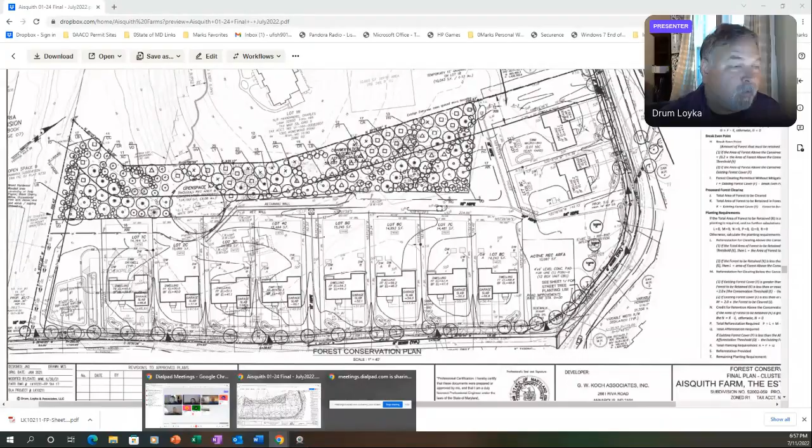How can I help? So you said you had some photos. Could you share some of those photos maybe now, so we can see exactly what you're doing? I think I have a better understanding than I did before. Okay. If I stop sharing, Lisette, any chance you can try and share those? Yes, are they in the meeting file? The community meeting folder. Yes. Linda, I think that might help folks understand a little more that are on the call.

I think I can see what you're talking about now, and I feel a lot more at ease. I'm more worried about the cost in later days and any kind of assessments that could be applied to us in Waterford. That is one thing that does bother me, but we'll have to work that out with our own homeowners. Hey, Linda, I'm going to share a link in the chat box to the county's SPSC design manual, so you can see what a finished product would look like. Okay, perfect. Thanks, Douglas.

And I want to say when Homewood Road comes out to Riva and you cross over, I can't remember the neighborhood, I believe there's some step pool design further up that way as well. Okay, can you see that? Yeah, we can. Can everybody see that? Oh, good. The photographs, great.

This is inside the woods at Homewood Road. It was pouring down rain when I was out there, so you can see the water's path in that picture, heading towards the stream. As she clicks through these, you may just have to do one at a time. Wow, that's serious water. I have a video that I can see if she can try and play. And then that's where it really starts to erode, and you can see all the laid down trees in the distance from the tornado.

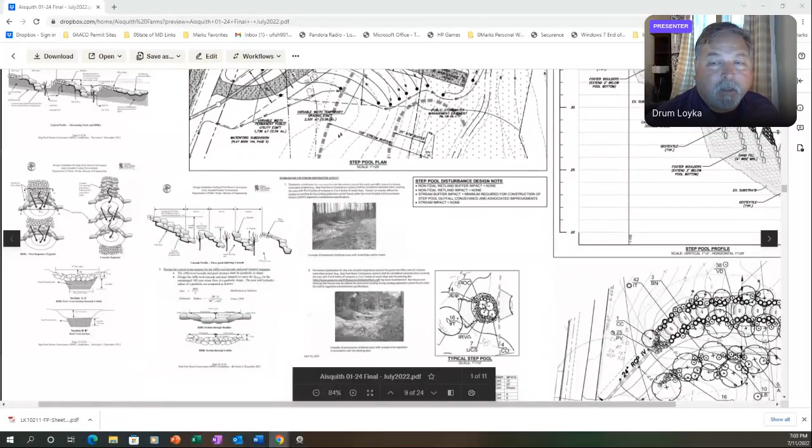That's what you see in this. Oh, I'm not sharing anymore. Hold on a second. Sorry, got ahead of myself there. That's what you see in the standard design, debris in the standard design. There are supposed to be woody stumps, and the ones that I've worked on in the past, they have. Yes. I didn't know if they had a contractor yet. They don't. We've been working on getting these agreements and trying to get permission to do this easement for a while now.